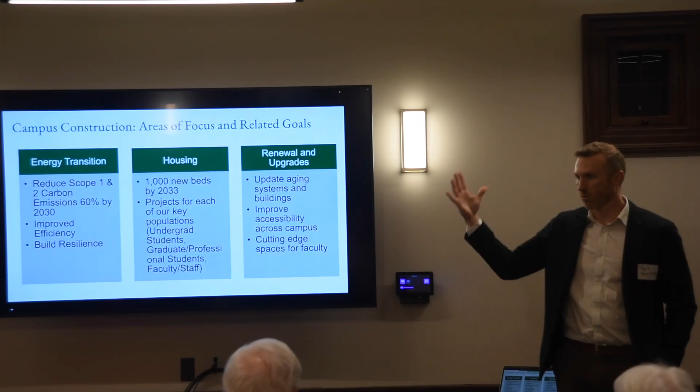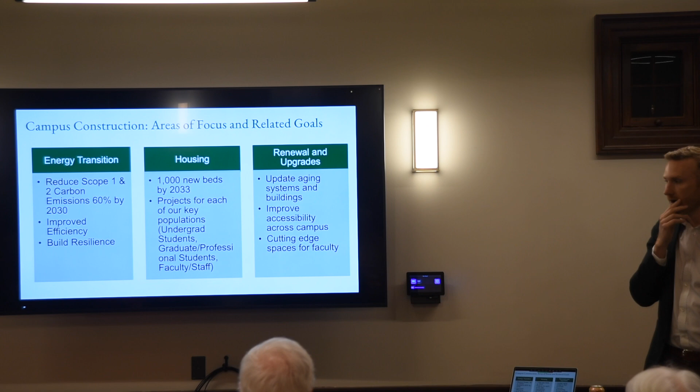So I would love to spend tonight walking you through, at a high level, what our overall strategy is, what we're working on across campus, and give you some detail about individual projects we have underway or are just about to start. Zooming way out, we have 3 primary areas of work that we're doing on campus.

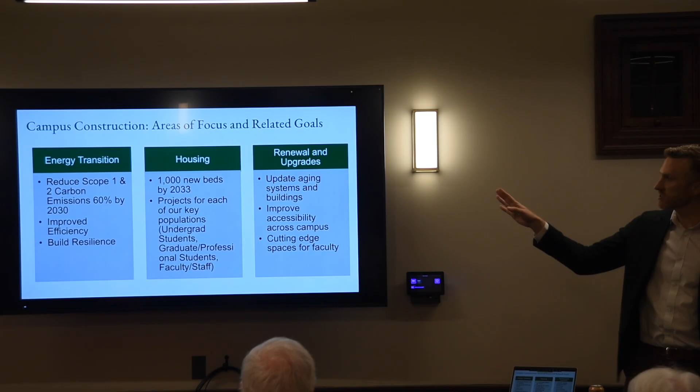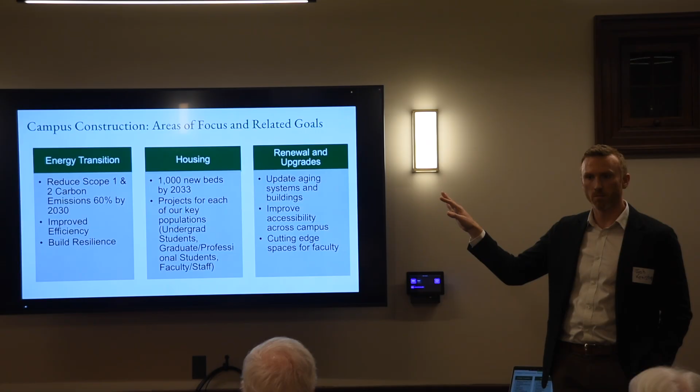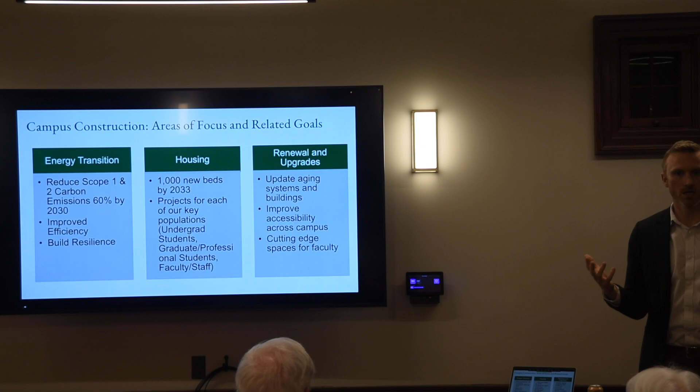The first is our energy transition. This is focused on reducing our scope 1 and 2 carbon emissions. We have a 60% reduction goal by 2030, and a 100% reduction goal by 2050. That's really about how we improve our efficiency, build resilience, and contribute to addressing the climate change crisis.

The second category, and probably the one you're seeing most visually, is our housing work. When President Beilock was named president, she was named about 9 months before she started. If you've got a sense of Sian, she likes to move quickly. So I started getting calls from her even before she started, about 6 months before, after she'd spent the last 3 months listening to people.

She said, everyone is telling me that housing is a problem. I don't want to wait until I get there—come to New York, let's figure out a strategy. So I took a couple of trips to New York, and by her inauguration, we were ready to commit to 1,000 new beds by 2033.

I'll talk a little about where we're tracking on some of those, but this is one of the key enablers we've heard as we've listened to the community. Part of what makes Dartmouth special are the students, the faculty, the staff—our ability to bring together outstanding people in this environment. If we don't have housing for those people, we can't do that; we're really missing an opportunity. So housing is foundational to so much of what we're doing.

And then finally is our renewal and upgrades program. As many of you know, we have a campus with buildings that are over 100 years old—those need tending to. We also have new faculty joining every year doing new types of research, and we have to think about how we're retrofitting old buildings to support their work.

So it's about $500 million on each of them—I'm rounding a little, but it's generally $1.5 billion over the course of 5 years, which reflects two things. One is the work we're doing to catch up, particularly on our energy transition; we didn't have a do-nothing scenario, and I'll talk more about that. Many parts of our system were over 100 years old and needed to be replaced—so we thought, let's replace it with something that's also better for the environment.

So let's dig into a few of these areas. I want to start with energy and how we're thinking about this. I mentioned the greenhouse gas goals we've set. Right now, since 2010, we've reduced our greenhouse gases by just under 30%. Our goal is to get to a 60% reduction by 2030, so we have a little bit of work to do.

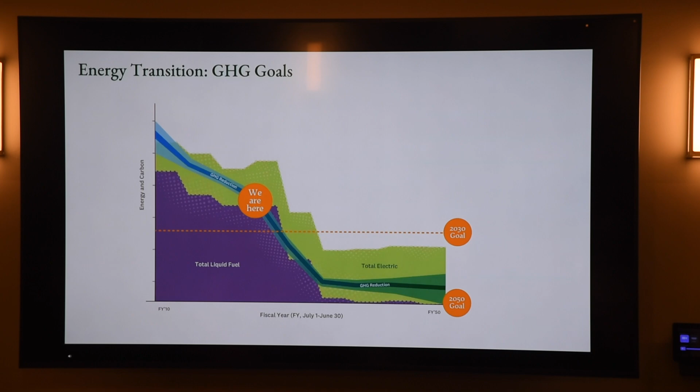I think we're going to get pretty close. Our biggest challenge right now is how much construction we can actually do to hit that goal. We know what we want to do, we have the dollars to do it, and it's how quickly can we put the pipes in the ground and build the facilities that we need.

But we know what we want to do. We actually know what we would need to do to get to an 80% reduction right now. We've done some studies, we understand the exact assets that we would want to put in place. What we don't know is that last 20%. We are not sure how we will get to a full 100% reduction.

I think that's one of the reasons that I feel really lucky to be trying to solve this at a place like Dartmouth. I don't have to do this on my own. We have some incredible faculty across the institution in engineering, in arts and sciences, that are actually doing work to help come up with the inventions, with the solutions that will help us get there. As we think about this, I really drive the kind of construction and operations piece, but there's a big portion of this that's really working with our faculty and our students to think about what is the innovation that's going to help us solve that last 20%.

One of the things that we launched over the last couple of years is this thing called the Climate Collaborative, where we're actually inviting faculty and students to come into the construction projects and use that as a living lab, giving them access to the data that our professional engineers are doing, so they can bring that into the work that they're researching. It's been a really exciting partnership opportunity between the operational teams and our faculty to think about how we solve some of the hardest problems on our campus, but also how do those then relate more broadly.

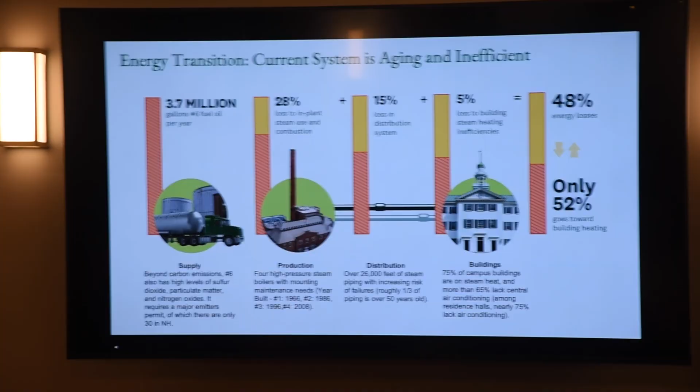Okay, so I said we had a do-nothing scenario. And what I meant by that was we really have a current system that is aging and inefficient. So even if we didn't have greenhouse gas goals, which are incredibly important, but even if we didn't have those, we would need to be doing something on our energy system right now. So what this graphic shows us is the current system that we have in place. Many of you know we have a centralized steam heating plant.

Most of our buildings don't have boilers or furnaces in their basement. Most of our buildings are connected via district pipes to the central heating plant. And so that plant, we get 3.7 million gallons of number 6 fuel oil every year on average. That supply of number 6 fuel oil is not some of the best stuff. So it's been our goal to really reduce the amount of number 6 that we use on campus.

From there, the steam plant essentially uses that fossil fuel to heat up water and turn it into steam. That process, we lose 28% of the embodied energy in it. There's just a lack of efficiency in that process of turning the hot water using fossil fuel into steam. We then have to pipe it all the way around campus. With the heat loss in the pipes, we lose another 15% of the embedded energy. And then we finally make it to the buildings, and because many of our buildings are old and leaky, we lose another 5%. So from the initial BTUs that are delivered in that truck to getting to the final point of heating, we're losing 48% of the potential energy.

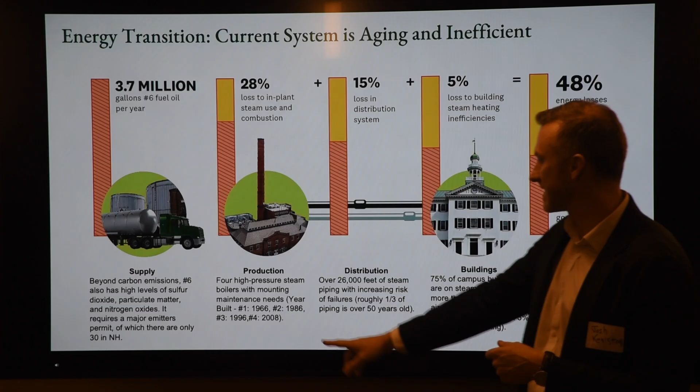Part of that is that we have some incredibly old assets. There are 4 boilers in the heating plant. The oldest boiler is from 1966. Now my texts from the boiler techs in the plant actually say that this is one of the easier ones to take care of. It's less finicky than the one from 2008. But nonetheless, it is aging and is getting to the end of its useful life.

We also have 26,000 feet of steam piping, and about a third of that is over 50 years old. And once the piping hits 50 years old, it starts to degrade. That's when, if you are ever walking around campus and you see steam coming out of something, it means that a pipe has failed, and that we need to go in and tackle it. So 75% of our buildings are on steam, and so we have more work to do to get them ready for where we're going next.

I'll also note that 65% of our buildings lack air conditioning, which, as our climate is shifting, particularly in the shoulder seasons of fall and spring and then our summer term, it's getting harder to really use our spaces effectively without air conditioning.

Should we ask questions at the end, or should we go? Yeah, if you want to jump in, go for it.

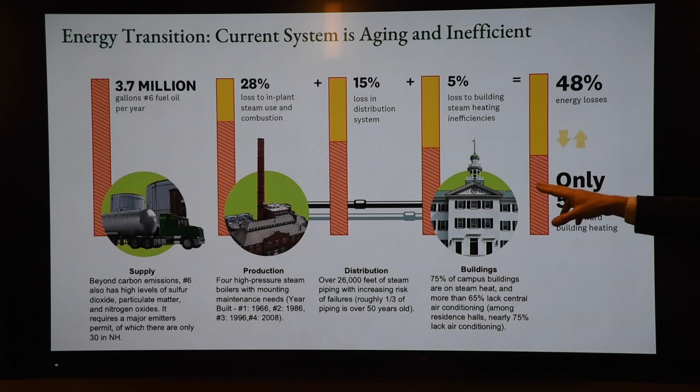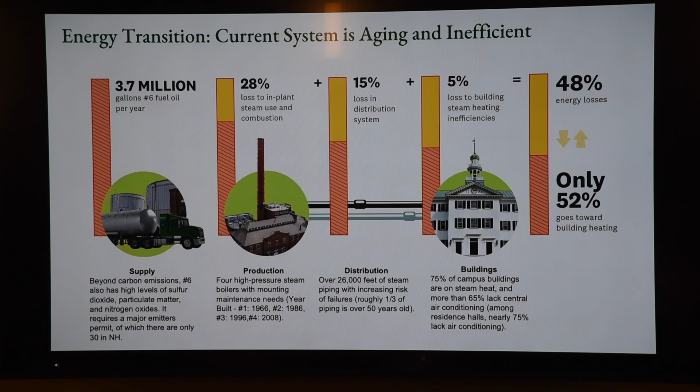Well, I was going to say, on the 48% on the previous slide, part of that is not energy loss, part of that's electricity, right? Not in this model. This model is specifically talking about the loss, basically the BTUs in that delivered oil, and what percent of that embodied energy we're losing along the way. This is just looking at the steam heating system. Oh, you're talking about cogen. Yes. Yeah. Yes, part of that is electricity. I don't know how that's accounted for in this number.

That's a good question. But it's a fair question.

Yeah, you know, one thing, now nearly 40 years ago when I was a student, the heat in the rooms was either on or off. It was sort of binary. And in the middle of the winter, you'd be amazed at the number of windows that were open to try to get something habitable. I've driven through town in just the last couple of years, and I've still seen a lot of windows open. So I think there might be some improvements there if there's investment in controls and better ways to optimize thermostats in each room and get better control on the heating.

Yeah, 100%. And some of that is just the limitations of the steam system. And at what level can we actually implement those controls? But you're right, in many of our buildings it's still on or off. Even in Parkhurst, for my offices, the heat comes on for the first 15 minutes of the hour, and that's it. There was that main knob to turn it on and off, and then there was a numbered knob that was supposed to be temperature control. It never did anything. Yeah, some of those don't do as much as they purport to do.

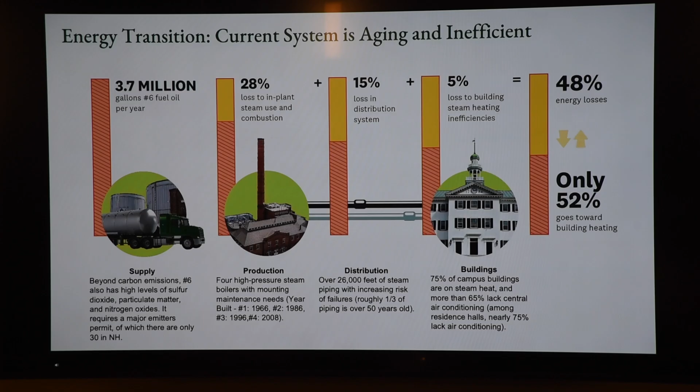So you said 75% of the campus buildings are on steam heat. How do they heat the other 25%? That is a great question. And that's going to lead us right to where we are. I didn't plant you either.

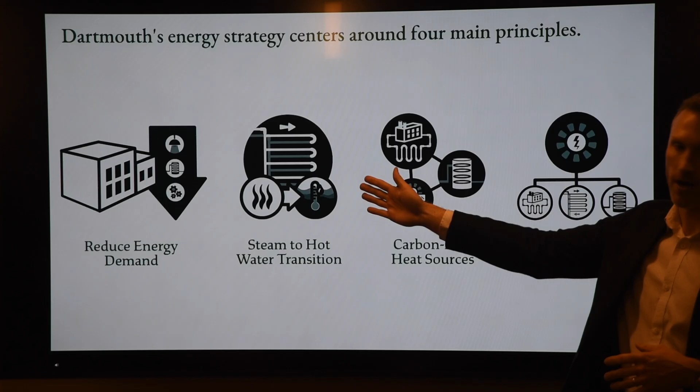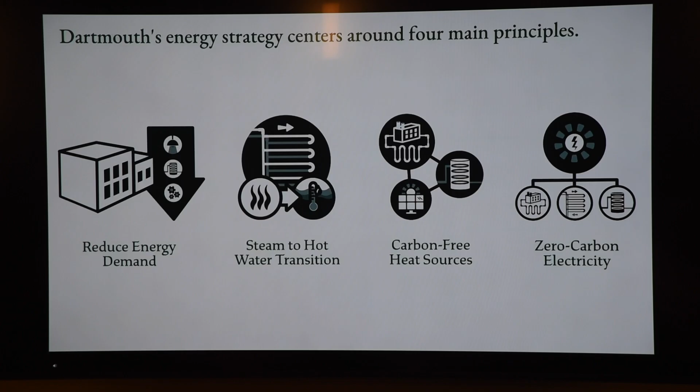That's just natural happening. So, turning to where we head, some of this is work that's already been done. We're not starting from scratch. But we have 4 key strategies that we look at as we're transitioning our energy system. The first is to reduce our energy demand. This is energy efficiency. Wherever we can reduce the amount of energy that we need in any given building, it just makes it that much easier to solve our problems down the line. If we're able to reduce it by 20%, that's 20% less that we need to solve for. So we think this is probably the safest and smartest first investment that we can make. And so a lot of effort has been put into making our buildings more efficient, whether it's how we use electricity, but even more importantly, thinking about the envelopes and how we insulate our buildings.

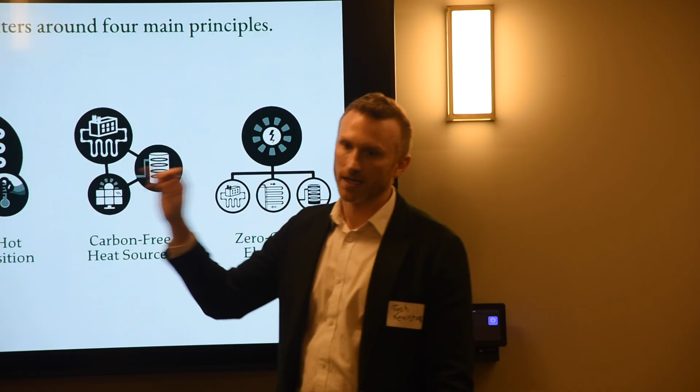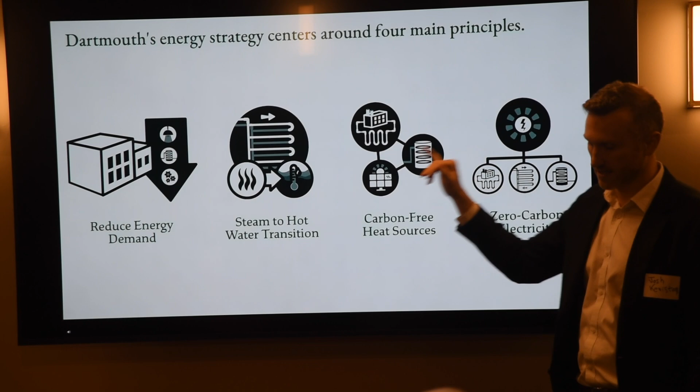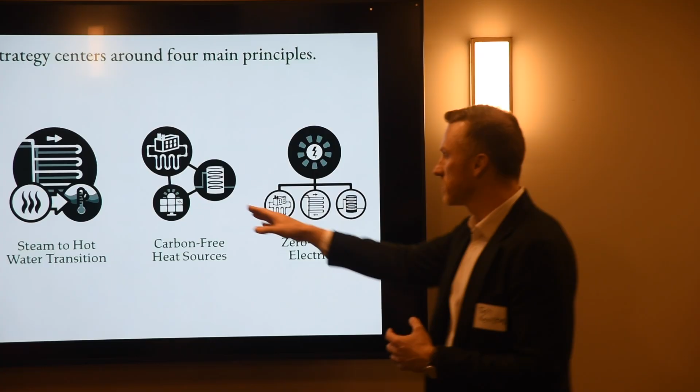The second piece, and this goes to your question, is a transition from steam to hot water. That seems like a pretty small little thing, doesn't seem particularly innovative, but it's a huge shift for us. The steam system is a pressurized system that requires a really intense form of heating to create steam, and it really limits us on what we can do. As we go to hot water, one, it's more efficient, and two, it allows us to be more flexible in how we actually generate the heat for our buildings. So the 25% of our buildings, this has been on our horizon. As we've been doing renovations and building new buildings over the last decade, we've been trying to transition to hot water, which is just a more efficient way to heat your buildings.

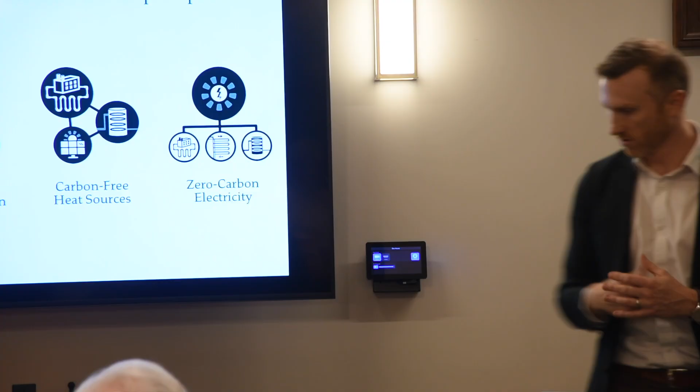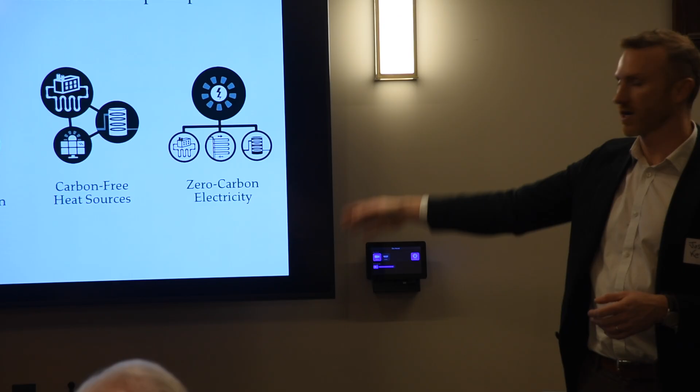The third piece is carbon-free heat sources. So this is moving away from burning fossil fuel in our central plant. And part of what happens when you move to carbon-free heat sources, a lot of those sources now require electricity. And so we need to make sure that we're getting our electricity from zero carbon sources.

Is there some change in that front? No, so New England's grid is 65% gas.

Ideally, right now we're going to do this in phases. We have been looking for projects we can tap into that would allow us to have more zero carbon electricity in the mix. Right now, if we just rely on the grid, it doesn't get us there.

So we're looking at whether there are additional projects we can tap into, either a mechanism called virtual PPAs, which would be within the overall grid network, or could we actually do something behind the meter, like a larger scale solar installation that would help us. We don't have the zero carbon piece fully figured out on the electric front. It's an area we need to continue to push on.

I think the dams on the Connecticut and Deerfield River sold maybe 8 or 10 years ago for something like 150 million. I don't know the exact number, but I know they shifted hands. That's obviously a lot of zero carbon electricity, probably more than we need, times 10 maybe.

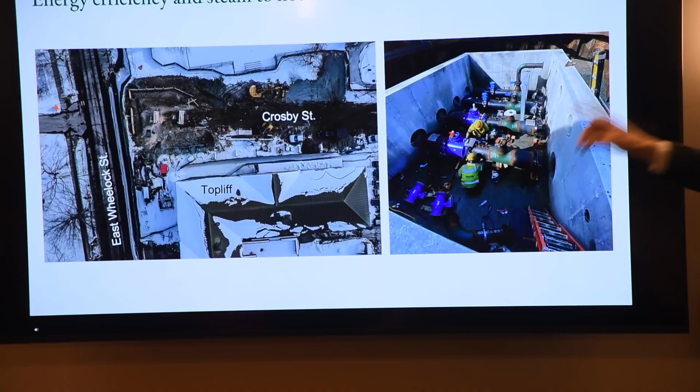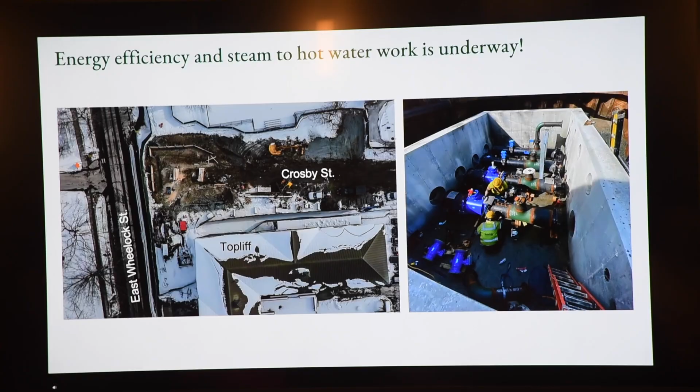Most of these pictures I'm going to show you, we've been doing once a month drone video captures to help us monitor how everything's going on campus. So these are from our February 2nd drone flight.

The work that has mostly been happening so far has really been focused on energy efficiency and our hot water system. The work happening on Crosby Street is essentially laying the distribution piping that allows us to transition off of steam onto hot water.

And you can see the level of complexity. These are the pipes that are going into the vaults that will live underneath Crosby Street.

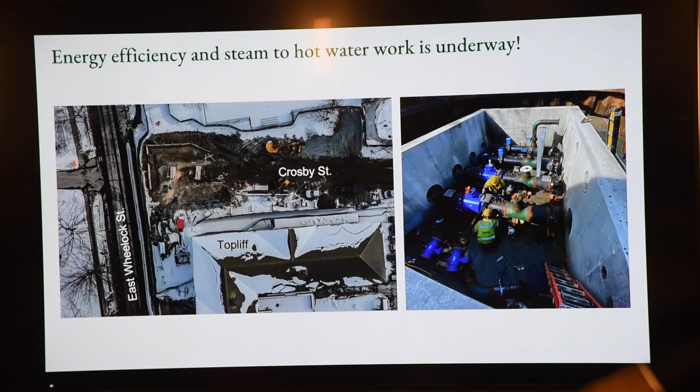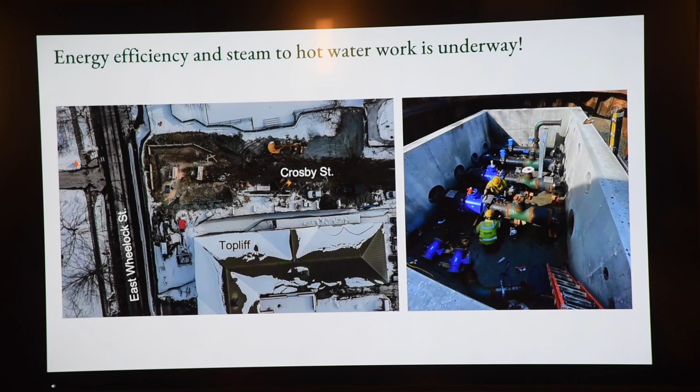One of the things we're also doing, we're not just replacing the steam with hot water, we're also adding a chilled water system. Part of the reason is that heat pumps, many of you probably have them in your homes where they provide both air conditioning and heating, actually work on both ends, and they work well when you're doing both.

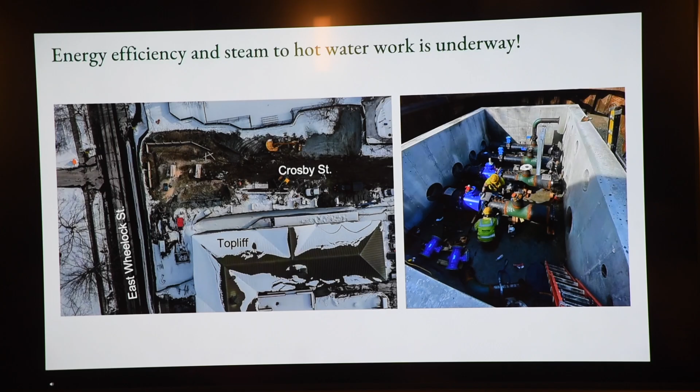So it's an opportunity for us to actually add air conditioning to a lot of the places on campus. That's the work that has been underway so far.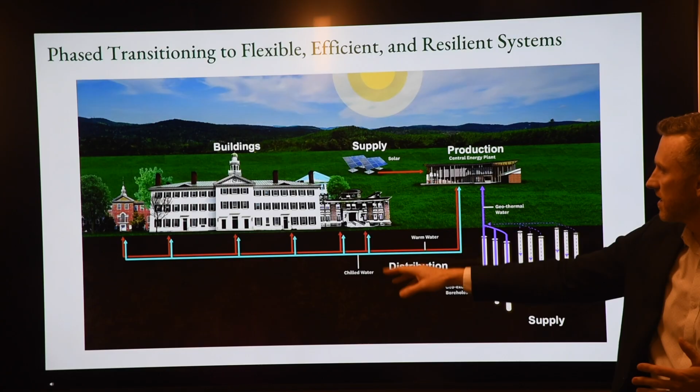Where we're going, the next phase of this work is to start thinking about how we're producing our heating and chilled water. The red and greenish-blue lines here are our distribution systems. We've been getting our buildings ready by preparing them to convert to hot water, and now we're starting to think about what the production side looks like.

The current thinking is to install geo-exchange wells. This involves drilling closed-loop systems 500 to 800 feet into the ground, piping into those closed-loop systems water that is connected to commercial-scale heat pumps, using the ambient temperature of the ground, which in our area sits around 55 degrees.

We use that as a battery to store the energy, whether it's cooling in the summer, heating in the winter, or a little of both during the shoulder seasons. Some of you may have heard about plans we're advancing for us to start doing drilling.

Turns out that part of what you need to do for traditional drilling is remove about 6 feet of topsoil. And to remove 6 feet of topsoil for over 500 wells, that's a lot of dump trucks running through downtown. So we put a pause on that and went back to the drawing board and said, okay, maybe we need to sequence this differently.

We definitely can't do this while Crosby Street is closed. As we were looking at it, something came up: a new generation of drilling technology that basically uses directional drilling.

Rather than having to clear off the entire 6 feet of an entire field, you only have to clear off a smaller area to set up your drill rig, and then the drill rig spreads out underground rather than having to go down the whole field.

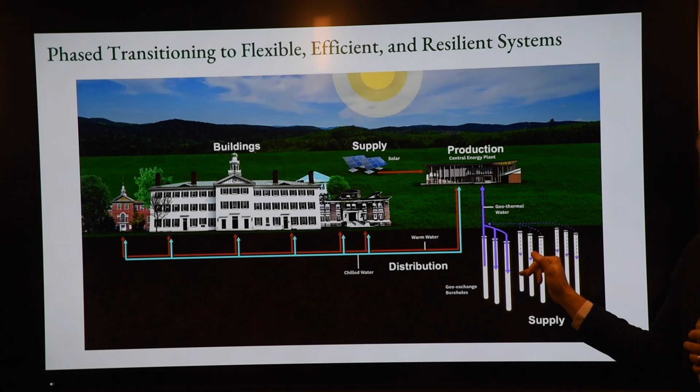Any questions on energy? I'm going to move to housing next, but any questions on energy? Well, I just wonder where you're thinking of doing this. We are thinking about places that are already green spaces - fields, the green. The only thing you can't do once you install these, unless you've prepared for the exact building that's going to go there, is put a building over it. So we're looking for places that we think would probably remain green for a very long time.

The green is a possibility - it's one of the ones we're studying for sure. How many acres do you need? How about doing that? We could. It depends on what phasing.

Part of our whole strategy for this is not to do it once and flip a switch. Our goal, as I said, we have 4 boilers in the central plant, and our goal is to take one boiler off at a time. Because if we were to take all of the boilers off at once, I think we would need something like 3,000 boreholes. We're not going to do that all at once - we're looking at what we can do with 300 to 500 boreholes. I think the green is in that range - somewhere between 300 and 500 that you could fit in a bore field there.

That's 5 acres. I'm unclear, is this driven by oil or is it driven by electricity? How did I miss that? Nope, that's a great question - this part of the system, switching to the heat pump, is driven by solar or some electrical source.

It wouldn't be just solar because we need to use it at night, but some kind of electric source. What's the percentage of solar? Right, so we haven't figured out what we're going to do going forward. Right now we have solar on a number of our buildings - we get about 3% of our electricity from the solar we have on campus. We are looking at a ton of different projects, including wind projects, but to the earlier question, we have not figured out this supply piece of it.

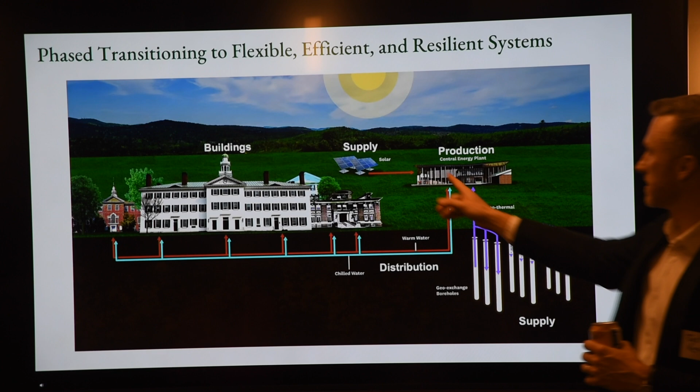So to go back to the dam question, you don't necessarily need to own the dams, but you could enter into a PPA with the dam owners. I'm more in favor of that model than actually being the owner of the dam.

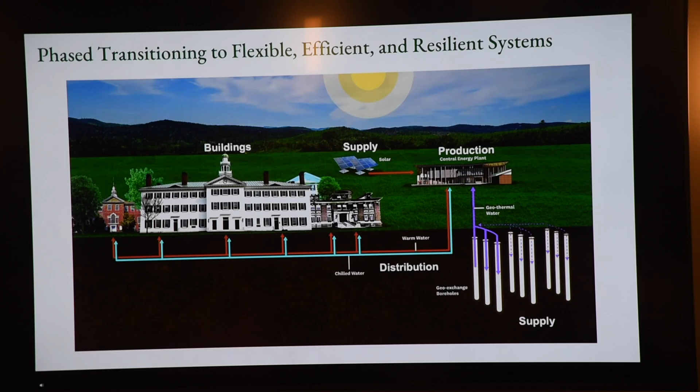There's a simplicity to steam. It's a pressurized system, and it generally comes with a little bit more humidity. The switch to hot water isn't pressurized, so it means we need more pumps around campus, and in certain facilities, depending on requirements, we may have to add humidification.

That's part of what we call our high performance building standard. As we think about moving to buildings that have really high efficiency and are super well insulated, it introduces a whole other set of things you need to think about.

One thing I find really interesting: a lot of people have asked why we don't just add insulation to our buildings. Some of our buildings structurally wouldn't allow that, because they're designed to let heat escape through the roof to melt the snow, so the building doesn't have to support the weight of the snow. If we insulated it, the snow would sit there and create a structural problem.

And with brick buildings, don't you need a certain amount of heat passing through, otherwise the mortar fails? Yes, Dartmouth Hall is a great example. When we did the Dartmouth Hall renovation, we wanted to improve efficiency. Most brick has moisture in it, and in a similar concept, the mortar and bricks actually require some heat, otherwise that moisture becomes a problem and creates cracking and structural issues.

So we had to test our brick and mortar to see what the water content was, and that guided us in terms of how much extra insulation we could add. We were able to add about 2 inches of insulation onto Dartmouth Hall. It would have been great to make that 5 inches, but that would have been too much, so we landed on about 2 inches. It's a little more efficient, but not as efficient as new construction.

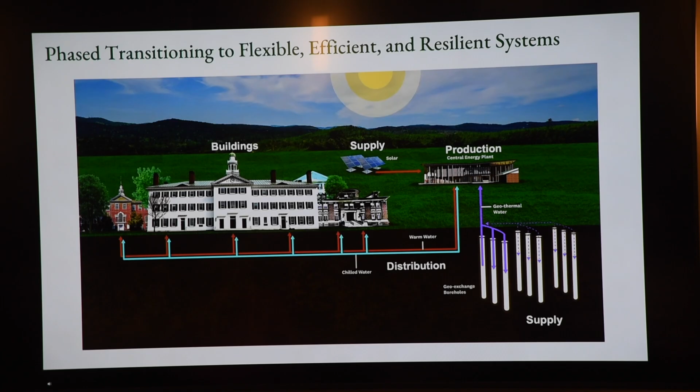Okay, so let's move to housing. I want to start with Sargent Circle. It sounds like some people already heard about this - we actually had a ribbon cutting ceremony this morning. This is a 21-unit development, just across the street from the Campion Rink and Sachem Village. This is faculty and staff rental housing, the first housing for faculty and staff that Dartmouth has developed in almost 20 years.

These are mostly 3-bed, 3.5 bath units really geared towards the type of housing our faculty and staff need. Every year I hear about people we were trying to recruit who couldn't come because we didn't have the housing they needed. I joke - I'm not a huge sports fan, but a couple people on my team are, and they say we should think of this as a single. 21 units - we probably need hundreds, but we got to start somewhere. So this might not be a home run, but it's getting us to first base and setting us on our way, so we were really excited.

The first 8 units are ready now - these are prefab homes from Huntington Homes in Vermont. The remaining units will be available this summer, and we already have wait lists for it. So we know there's demand, and we're starting to look at what our next project can be to add to it, because housing is a really critical piece. This faculty staff housing contributes to Sian's goal of 1,000 beds.

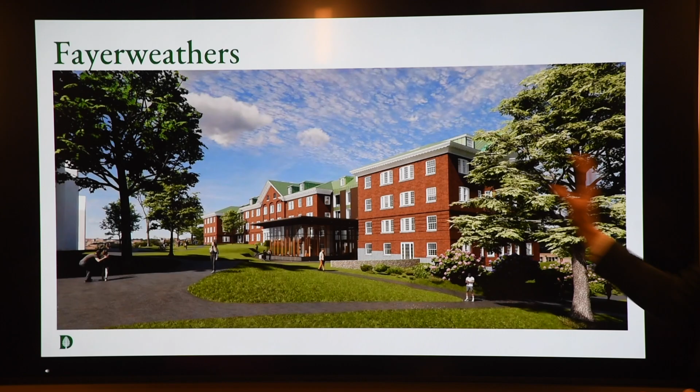And Russo Hall will help us to do that. So that's phase one. And if you haven't been up to Fayerweather, one of the things we're looking at, in addition to renovating the traditional buildings, is adding some more programming space to support our house communities, to create some of the spaces for the type of academic and co-curricular programming that our house professors and others in that community would like to do.

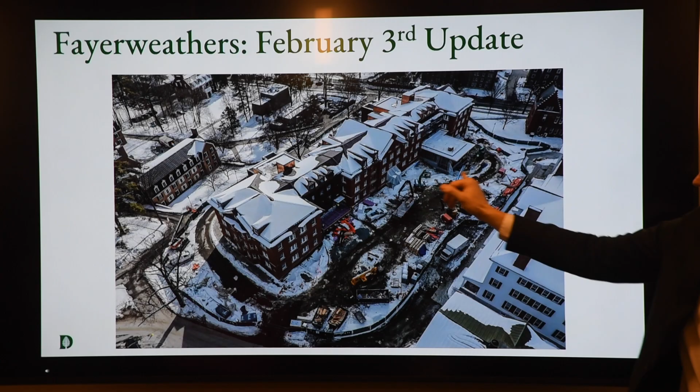So this, the February 3rd update, you can see this is tracking along quite well. This space right here is that kind of grand hall, which will be a key programming and living room space for the housing community.

Just for scale, you said 285 at Russo. How many beds are in Fayerweather versus, say, New Hampshire, Topliff, just so we can kind of... Oh, you're testing me.

I think we're roughly 260-ish. So Russo is roughly the size of... before the renovation or after? We gained about 30 beds by doing some of this infill.

Your previous chart showed little red lines slicing through the wigwam dormitories and the River cluster. Are you talking about these? Yes, River cluster. And the other ones next to it, they used to be the tree houses for a while, and they tore those down and put in some brick buildings that were there.

So Maxwell, Channing Cox, which are these buildings right here, are a slightly different vintage from these. We are planning to keep these around for a while.

They are already apartment style living, so they match well with the other buildings we're doing on West Wheelock. I should mention Russo Hall is all apartment style, typically 4 bedrooms, sharing a living room, a full kitchen, and 2 baths. So this is kind of going to become our apartment neighborhood, primarily for juniors and seniors. So these ones we think we're going to keep for quite a while.

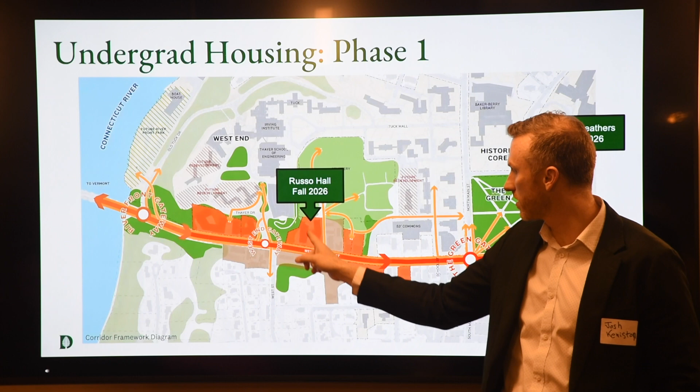What is the meaning of the green versus red versus the red striped area? Does that color coding indicate anything? The green captures green space, meaning we are thinking about this as landscape opportunity. The orange are the parcels we are developing, either that we own and have a plan for, or that we own but don't necessarily have redevelopment plans for. That last orange one is the 2 former Gray apartment buildings that you guys bought.

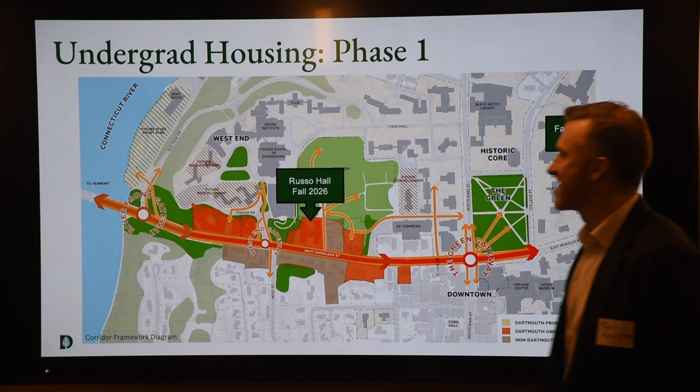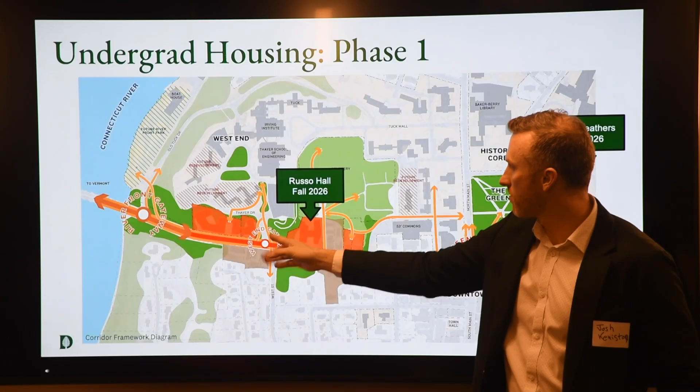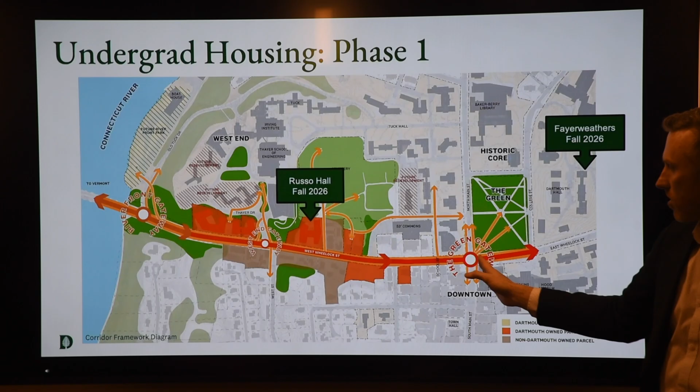Are those traffic circles, the 3 ovals? No, those are not traffic circles, though there are a few folks who think there should be. We're really thinking about this as what are the kind of arrival moments. There's an important arrival moment when you come across the bridge, another at Thayer Drive going up into the west end, and then our traditional arrival moment when you get to the green. When we work with our design teams and landscape architects, we want to be thoughtful about each of these moments. We call them gateways, and we're being thoughtful about how those are going to look and feel.

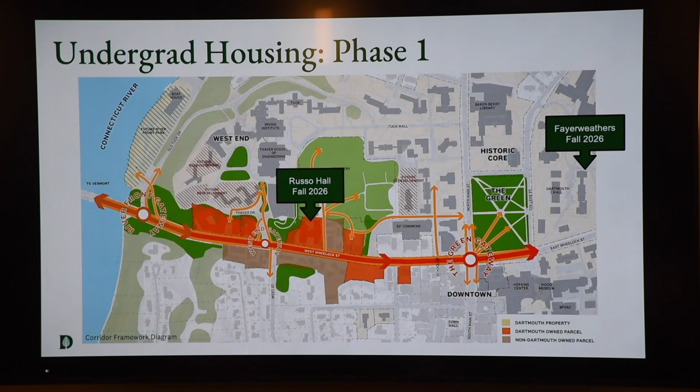And to the left of Russo, west of Russo, there's 1989, Shonda Rhimes Hall, and the Alumni Hall, right? In that order? Let me look at these and then we can go into depth on all of those.

So this is Russo, coming right along. Just as a reminder of what used to be at 25 West Wheelock, and this is what's going to go there. We're going from about 30 beds to 285 beds. A lot has happened since February 3rd—they've finished up the masonry work, so some of that is off, but you can get a sense of how it's all coming together.

So phase 1: both of these projects, Fayerweathers and Russo, are on track to open this coming fall. They'll be done over the summer.

Josh, when you have the traffic thing there, isn't there any time between about 3 and 6 o'clock when Wheelock Street all the way up to Norwich and down past Park Street is completely gridlocked? So how are you putting that into your computer when you're doing all your modeling, because they tell them they can't have cars? The students are not going to be parking on West Wheelock. Nobody can park, there's no parking associated with these buildings. The students will be able to park at A lot, and there will be shuttling, but we're not adding any cars to this mix.

We are right now working with the town of Hanover to figure out what we need to do with the sidewalk, to probably enlarge it, add a shared use path, and probably have some tree buffer. But we don't own the road, that's the town of Hanover, so we're having conversations with them right now. Can you also put the cables underground? We're looking at that too, yeah, for sure.

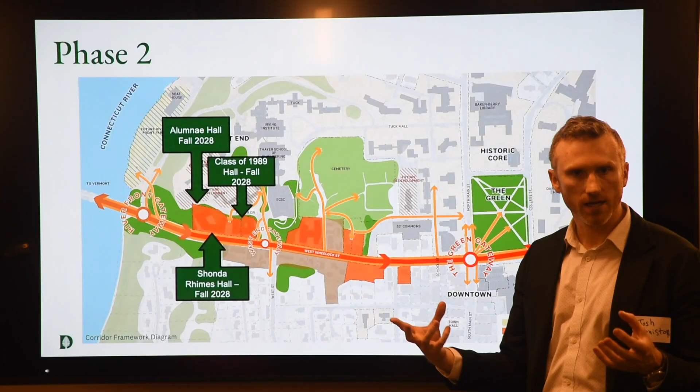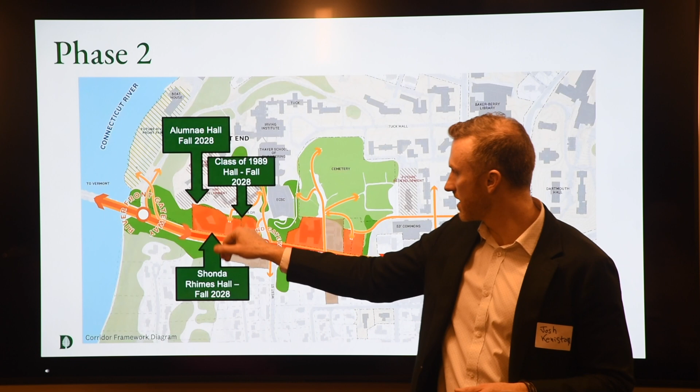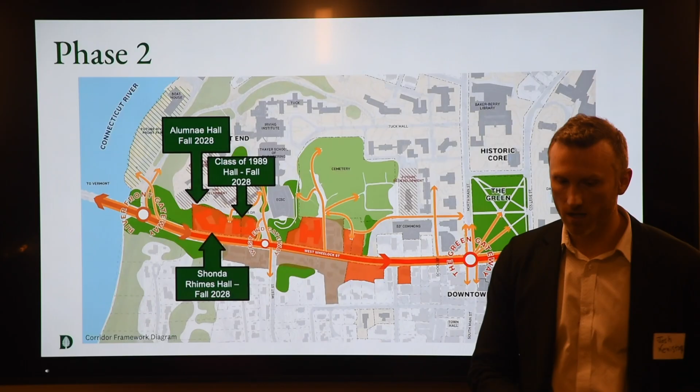And then phase 2, and this is kind of where we're headed. So these set of buildings, the way that we think about these, it's 2 buildings, and each building has 2 halls. We create the halls to kind of create sub-communities within the buildings. So the class of 1989 named both of the halls in this building, and then Shonda Rhimes named the first hall here, and then this one all the way to the west is Alumnae Hall. These are the ones that if you've been up and down West Wheelock, they've started to do the site work. And these are going to be ready for fall of 2028.

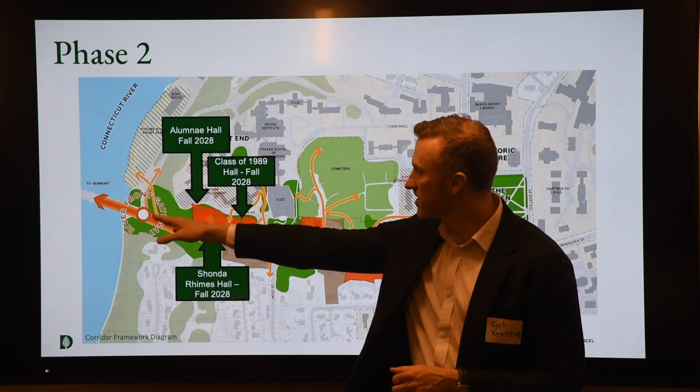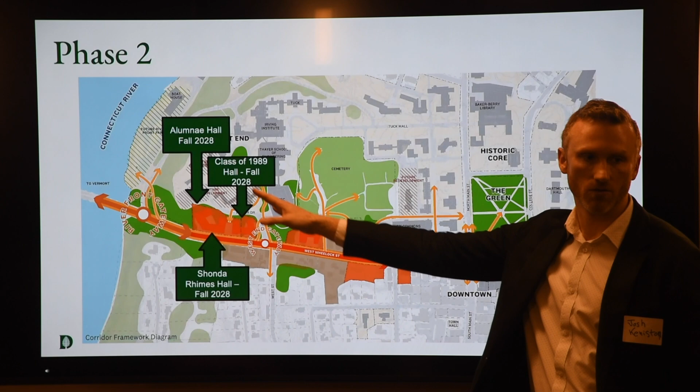Yeah, that is part of our conversation with the town right now. We would love to have those buried. The utility companies can be challenging to work with, but we are trying really hard to get those buried, because I 100% agree. As we've been working with the town staff, we feel really strongly that making this something that is pedestrian safe, bike safe, but also bringing in some vegetation, some landscaping - there's a real moment to turn this into a real welcoming experience as you come across the bridge.

So that's Shonda Rhimes Hall, and then we go up to the Class of 1989 building. In order to build that, you have to demo that white house that's there now serving as construction headquarters. Is that going soon? Yeah, it is. Just driving up today, it's totally... is the house gone? I don't think the house is gone, I think it's just overwhelmed with all the rubble and the trees. Yeah, it's moving quickly, very quickly.

All right, that's what I have for you tonight.

In the various housing phases that you mentioned, there was no mention of the Choate dorms. Asking for a friend, what's being planned there?

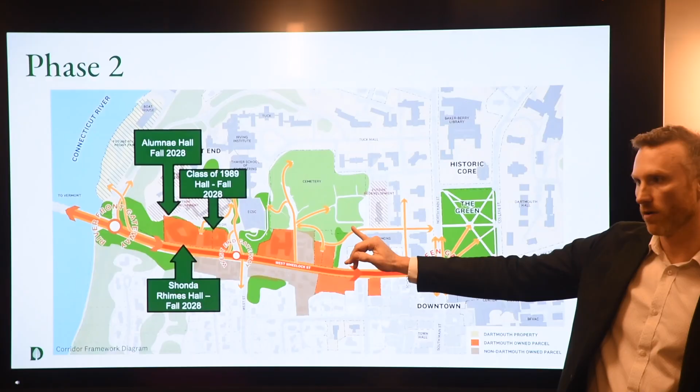And then south of Wheelock, across from Russo, or maybe up the hill a little bit, there are a couple lots that are cleared right now using parking, and there are houses there. Those are planned for. So we try and think a few steps ahead, but we're really focused on what we need to build right now.

It's a bit of a mixed bag. A couple of these buildings needed to be torn down. They were not livable, so the ones that need to be torn down have come down. They're going to be used as construction staging. We don't currently have plans for this site yet. We will put something there.

I will say we think about the south side of the street in a very different way than the north side of the street. The north side, in our minds, is now campus, it's part of the Dartmouth campus, and we're thinking about how we connect it all together. The south side we think of as a transitional zone between campus and the neighborhood. So I would suspect that whatever we do on the south side would be less dense, not as tall, more about how we transition from these buildings to the neighborhood that sits there.

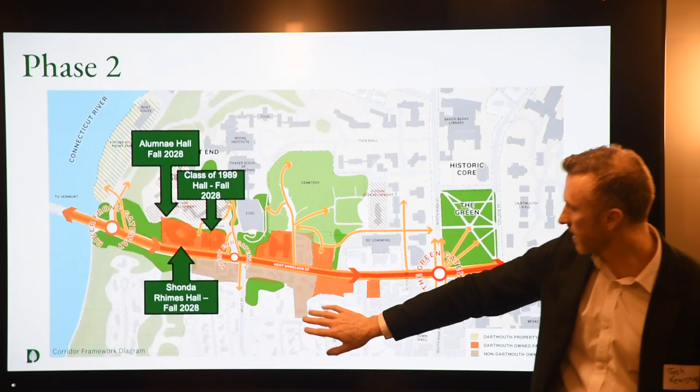But might it still be student or staff? Yeah, I don't know. I think we don't love the idea of having students cross the street—not to say we don't trust our undergrads, but they make some different decisions. So right now we don't know. I think we've been leaning towards grad students or faculty staff, but we're not fully there yet.

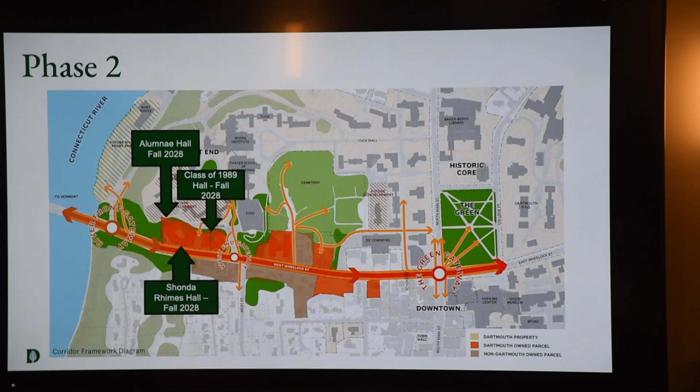After you're done with the Fayers, I heard that the next project on currently existing buildings is going to be Mass Row. Is that still on the drawing board? Yeah, so French and Judge and Mass Row are going to be done at the same time. I should have mentioned that, I forgot about Mass Row. Yeah, they're being done at the same time.

And when you redo Mass Row, will you be adding beds there? Probably not. This is really interesting—to the casual observer, Fayers and Mass look very similar, but the geometry of them is pretty different. Mass Row does not provide the same opportunities to add beds as the Fayers. We will do some connectors, that's more about accessibility, making sure elevators can get to every floor. But in the Mass Row situation, the connectors are going to be much lighter touch. It just doesn't work as well—because of the depth of the floor plates, you do the infill, but then you lose beds, and the math doesn't work on it.

And what is the timeline for Mass Row? So we are currently in the early planning and feasibility for Mass Row and French Judge. That construction could start within 18 to 24 months, probably.

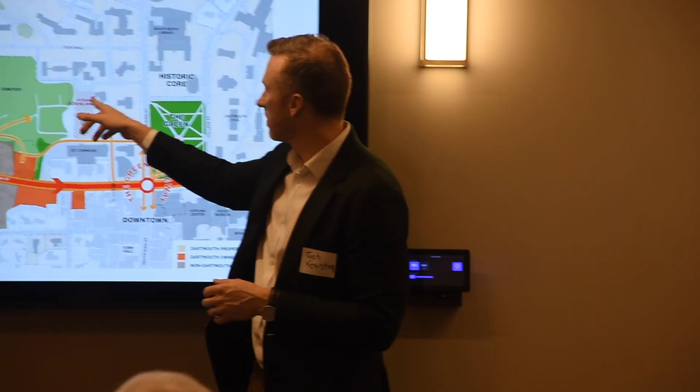I see you drew hash marks over Fairbanks Hall too, is that for a reason? That is because there's Fairbanks and then there's also parking there. Fairbanks as a building needs some love and attention. Similar to some of these other buildings, this map comes from our master plan, so part of it is we identify which buildings, when it's time, we're going to renovate versus which ones we'll use as a site for something new. So this is a potential site for us to do some redevelopment.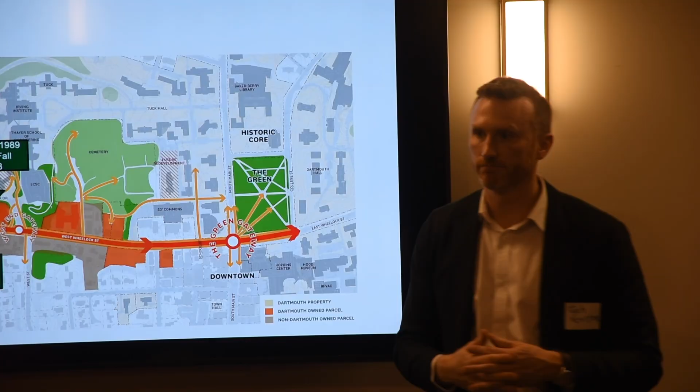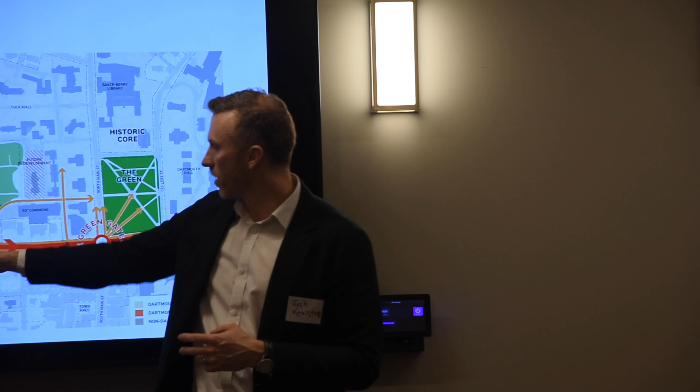So Josh, we're bringing students back to campus that are not currently there. Is there a need for more dining facilities, or is FOCO and the others sufficient? For now, we are okay. There are two things we're looking at. One, there will be a cafe added into the Class of 1989 Hall, so there'll be a little bit of added capacity there. All of these buildings on West Wheelock are apartment style, so they'll come with kitchens. We think the students that live there are not going to use the dining hall at quite the same rate, and to be honest, most of our off-campus students already have dining plans. So we're not actually increasing it by that much. But we are riding the line, for sure, particularly during peak hours. Tuesdays and Thursdays during peak hours there can be a line at FOCO that can be frustrating. But we're not quite at the point where we need to increase the size of the undergraduate body by any significant amount.

Increase or decrease? I would increase, yes. Assume they're not going to decrease. Yeah, that's definitely what you're saying -- there are conversations happening about what is the right scale going forward. A lot of our peers have announced that they're growing. Dartmouth is already the smallest Ivy, and so I think there's likely something we're going to need to do, but we need to go through a whole process to figure out what that looks like. I will say that when this was last studied, back in 2017, 2018, the biggest thing that came out of that report was you don't have the housing to even start to think about growing. So I do think as we figure out how to tackle some of these housing problems, that allows us to start having the conversation.

I saw in the Dartmouth blurb online today that you have a new title. They added strategic initiatives. Does that mean it's a new job or is it just a longer title? I had a mentor once who said the reward for the pie eating contest is more pie. So I have a little bit more pie, but my team is mostly the same. I'm working on a few additional things that I was already working on, and they've recognized it. Congratulations. Thank you. Thanks. Thank you, Josh.